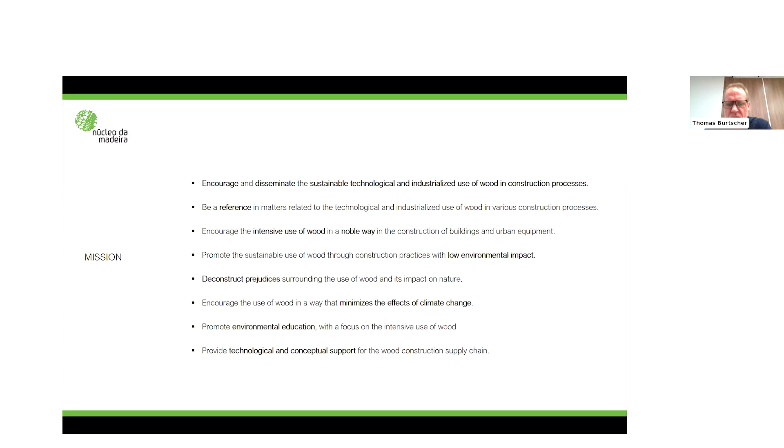So basically what we do, we advocate for the use of wood in construction from sustainably managed forests. We promote and demonstrate the viability of intensive, sustainable and noble use of wood in construction. We support industrial processes that make wood one of the most versatile materials. We demonstrate the contemporary nature of wood, and we strive to establish a sustainable supply chain for wood.

We basically focused on 5 axes: forests, components, education, design, and market.

And we are happy to say that we hosted an international event, from which we are developing a text. We'll go to COP30 that talks about the future of timber in construction worldwide.

We had very important people that deal with timber and construction, such as Eric Karsh, who works with Michael Green in one of the tallest buildings in the world. We have people from Japan like Tezuka Takaharu, who's worldwide known for his works, people from Chile, from France, from various countries. And from this final result, we hopefully wish to promote wood construction in Brazil.

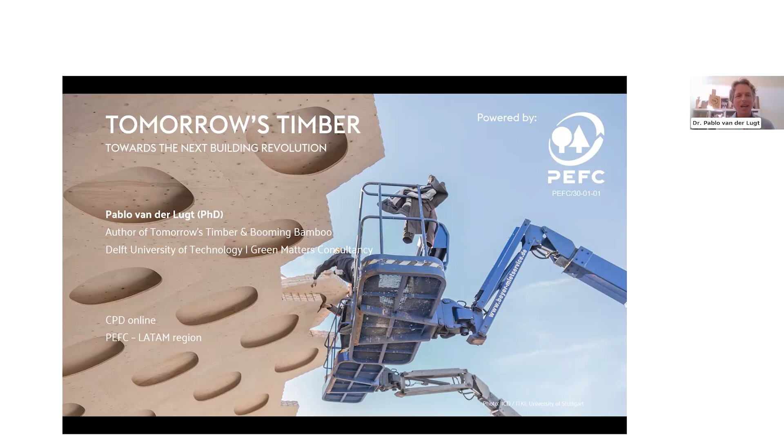Anyhow, it's a big pleasure to be able to present my latest findings. And again, it's also made possible through the support of sustainable forestry, through schemes such as PEFC, so I'm very grateful for that. As Adriana mentioned, I've written a couple of books and I like alliterations, so Tomorrow's Timber, Booming Bamboo. It was hard to find an alliteration in Spanish and Portuguese, that's on my wish list. But it's good to know that if you're interested, the book is also available in Spanish. So what I will be talking about in about an hour, if you really want to go into details and more background and scientific references, try to get a hold of a copy of the book.

Today, we're going to talk about the historic evolution of timber. Where did we come from and how did we end up making high-rise buildings out of timber? The why - why should we build in timber? What are the benefits? But also, what are the challenges? Because it is a completely different way of building than that we're used to. So in the coming hour, I hope you will learn more about it.

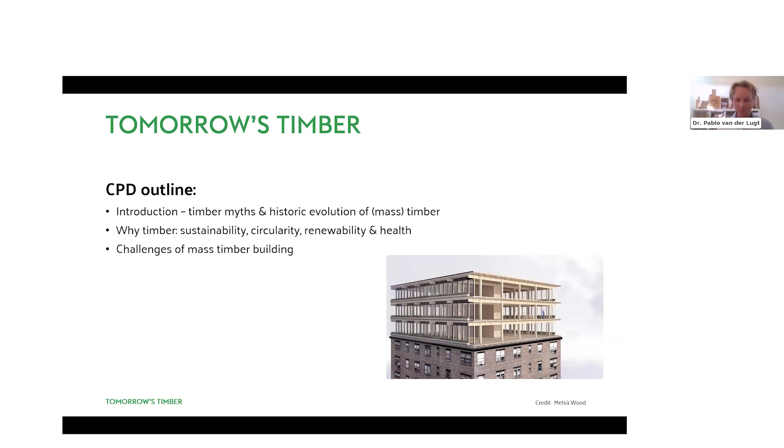So beginning from the start, and again, I'm talking a little bit from a European perspective, so bear with me, but I think it applies to the whole of the world. In the past, we used a lot more local materials, and most of those local materials were woods, but also bamboo, reeds that were grown locally. And we still see the heritage of the use of renewable materials, including timber, all over the world in our ancient buildings. In Europe, for example, we have churches over 1,000 years old, just made out of timber. Many of our historic houses in medieval city centers are made out of timber, largely made out of timber, inside and out.

This is one of the oldest buildings I know of in Japan. It's more than 1,500 years old, and it shows that if you construct well, timber can be very durable and survive for a very long time. Look at this particular design. It's quite simple, just overhangs, making sure the timber remains dry. Even if it temporarily gets wet, it's not a problem because it can ventilate and dry again. So timber can be an endless material in terms of lifespan.

But then came the Industrial Revolution. In the past, we used to build a lot more with timber and renewable materials. Then the Industrial Revolution came, and timber, which is of course a kind of irregular material, was largely substituted by bricks, by iron, later steel, and concrete. That makes sense because these materials are very stable in their technical performance. At that time, timber was not.

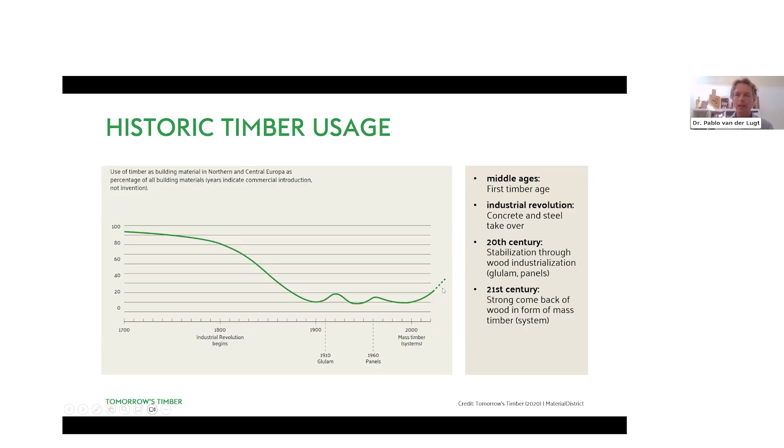So since the 1900s, there has been more standardization in timber construction through the development of glulam, large glue laminated beams, and the development of all kinds of panel materials—MDF, particle board, OSB. But since 2000, something interesting is happening, and the use of timber is increasing, because of the development of mass timber products.

If we have the timber source from a sustainably managed forest with a PEFC certification, we can do a lot of things with this resource because it will grow back. Part will go to the paper industry, maybe a part to the energy industry—I hope as little as possible because the CO2 will be emitted again. But a large part will be used through stranding, through peeling, or just through sawing into a whole assortment of timber products.

And the latest generation of timber products, like cross-laminated timber (CLT), glue laminated timber, but also, for example, laminated veneer lumber—I'll explain more about it later—enables timber to be used also in high-rise buildings with very good technical performance, such that it can substitute non-renewable materials like concrete, steel, and brick. And it gives a lot more opportunities actually.

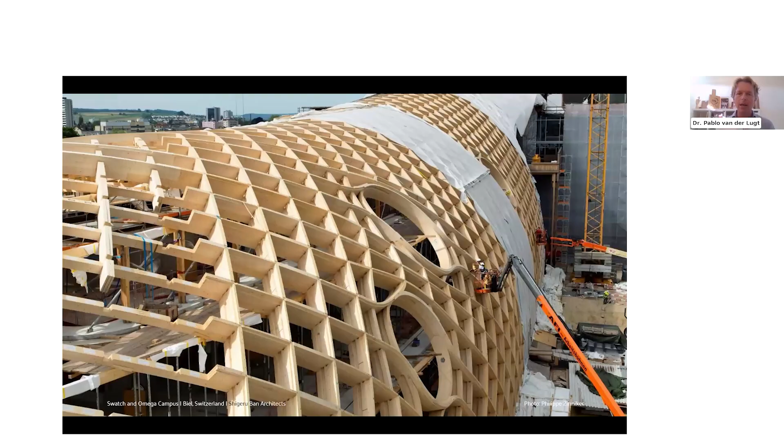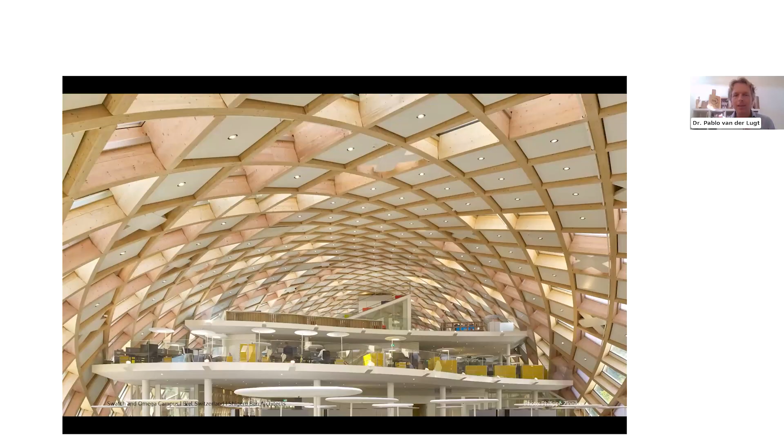As timber is 5 times lighter compared to concrete, you can make incredible designs based on parametric modeling. Look, this is the Swatch headquarters in Switzerland—look at this guy, how small he is. These are huge elements, all pre-manufactured in a factory based on CNC milling, and every piece fits into each other like a jigsaw puzzle. So this is the inside—it's curved, but every element is almost fitting into its place with millimeter precision.

Because it's so light, you can also make huge spans and fantastic architecture. Michael Green is one of my favorite architects—this is not his building, but he also designs skyscrapers out of timber. And we can also, with mass timber products, go up to almost 100 meters high.

Up to now, this is the tallest timber building we have in the world, completely made out of timber. There are higher ones, but they are hybrids with a concrete core. This project in Norway is fascinating because it uses timber on the outside, thermally modified cladding, but also on the inside. Going one step back, here you see the glue laminated columns and beams, the CLT flooring and walls, and outside the thermally modified, locally sourced pine.

This is another timber skyscraper, 80 meters tall, in Sweden, and it shows the many prefabrication possibilities of building in timber. Because it's so light and workable, you can make all 2D or even 3D elements completely in the factory, put them on the back of a truck, and build a lot quicker. Sometimes even the sanitary units and kitchens are already installed.

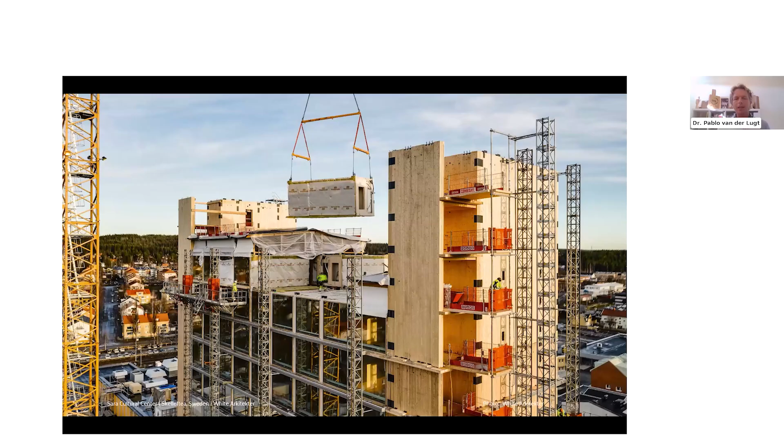I like this building, Sara Kulturhus—it's a hotel and conference center. It's magnificent, right? And it's all locally sourced, made of PEFC certified locally sourced timber. Even the elevator shafts are made out of pine, locally sourced pine. Here all the concrete is replaced by CLT, cross-laminated timber, and also on the inside you see timber.

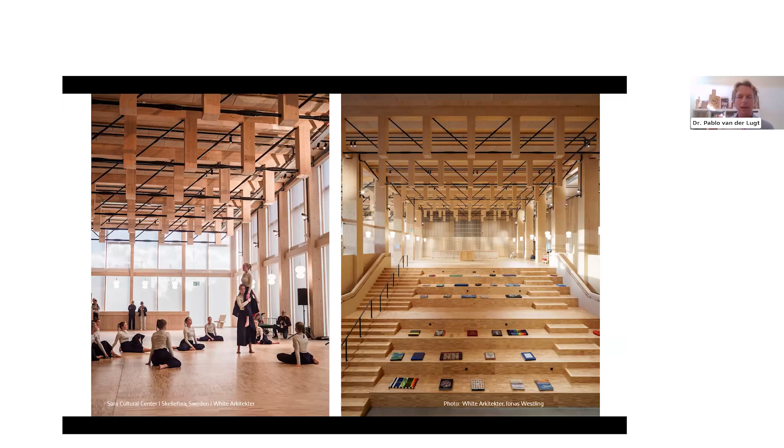I think you all know people love timber because of the aesthetics, because of the tactile aspects, because of the odor, but also because of the sounds. Look around you—when you go to a music theater, you'll almost always see a lot of timber around you.

People relate to timber, but they're also often worried about using it because they know the tree has grown for years. This is why it's so important that you only source timber when it's sustainably managed, and why hallmarks like PEFC and FSC are so important.

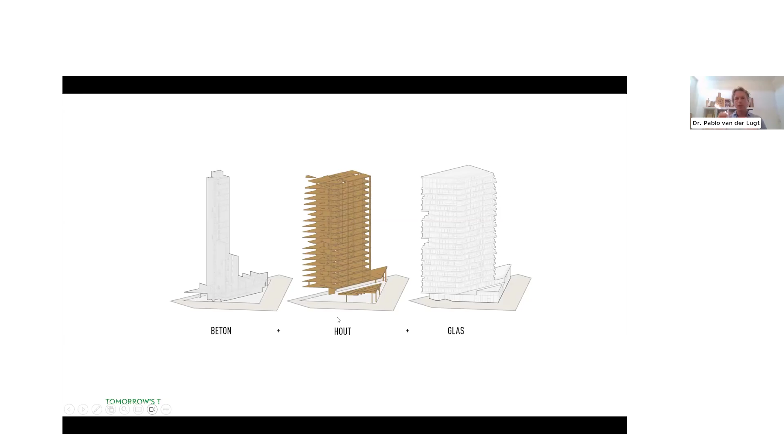Let's go to the Netherlands, because now we also have a skyscraper in timber there. This is Amsterdam, on the Amstel River. You see this building and think from the outside it's just an ordinary concrete and steel building, but don't be mistaken, it's largely made out of CLT. It's really high-end, and yes it still has a concrete core, but all the floors and structural walls are made out of CLT, covered with a whole skin of glass.

Timber is left exposed inside, and many people love it. They don't want everything in timber, but when, for example, the ceiling is in timber or the floor, or one or two of the walls, they love it. And it can also be high-end. So this is not just for tree huggers or ecological purists, it's also for mainstream people.

In South America, you're still starting with the mass timber revolution, and I tried to find a couple of projects with PEFC certified timber. This is one I found with the help of the PEFC Brazil team.

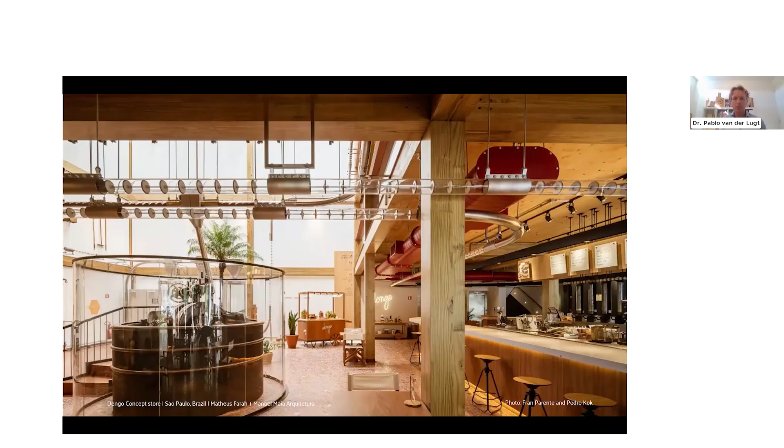It's the Dengo concept store. What I like about this building is that all the timber is left inside, and as I understand it, it's made from locally sourced timber from one of the local pioneering CLT factories. So I like it, of course. If you can use timber which grows locally, that's always better in terms of transport. Here you have Brazilian CLT, and correct me if I'm wrong later in the Q&A, but for me this is very cool to see.

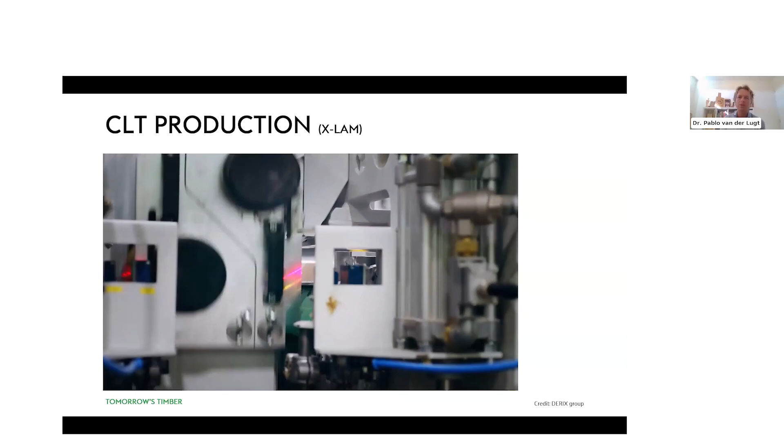So how is CLT made? This is a German factory, and look, it's just spruce. It goes through a laser eye, which is very important because it detects defects, knots, or other weak points in the timber. The weak points are taken out, and then you have the finger joint you see there. So what you see on the top and bottom of CLT is almost faultless, strong boards, and the lower quality boards go in the middle.

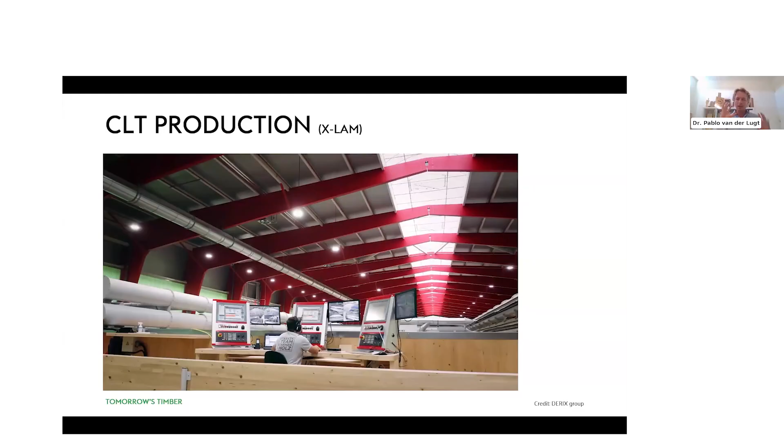I have a piece here. It's always an odd number of layers, 5, 7, 9 layers. All the processing happens in the factory, the milling for electricity, fittings, window openings or door openings, everything is done there. You saw some glue application. Many people are worried about the glue, but there's only 1% of glue in such a piece of CLT, so that's very little and it doesn't restrict recycling possibilities.

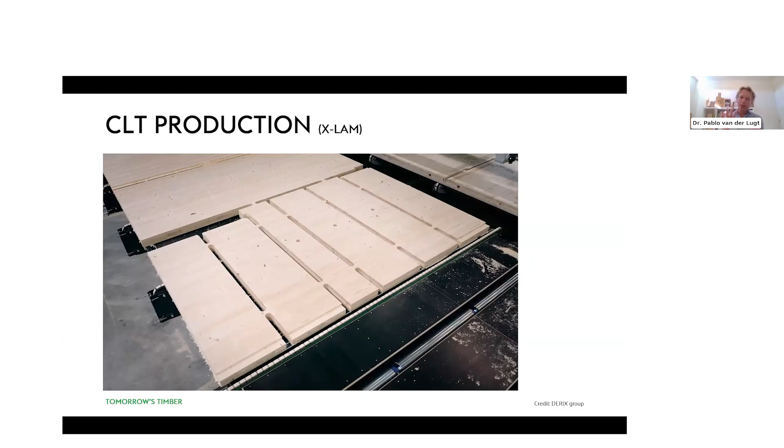When these pieces are ready, they go on the back of a truck to be transported to the building site. I make the comparison with IKEA, it's like an IKEA cupboard, but here it's 10 or 100 times bigger, and in this case it does fit. It's easy to make. So what you see here isn't a building site, it's an assembly site, because you can construct a lot faster when you use mass timber elements.

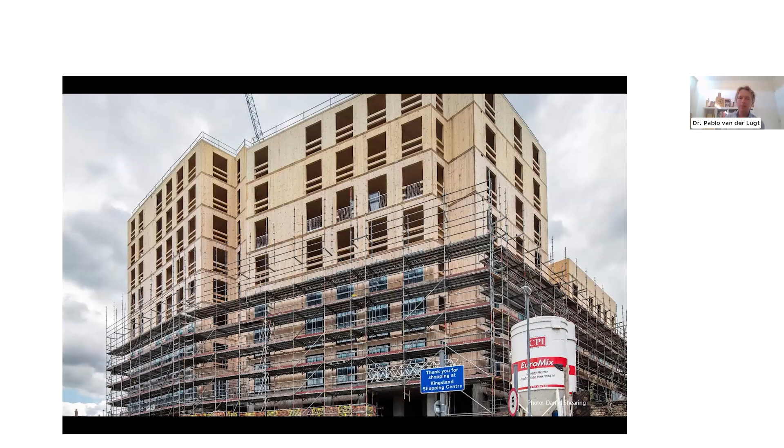Let's zoom in on this building, located in London. From the outside it looks like an ordinary brick building, like with the building in Amsterdam called Hout. This one, Dalston Works, from the outside you could say it's an ordinary concrete or brick building, but it's not. Don't be fooled, because it looks like brick, and even on the inside you wouldn't see there's timber. I think that's a pity, but it doesn't matter, because for carbon storage benefits it's still a very good idea.

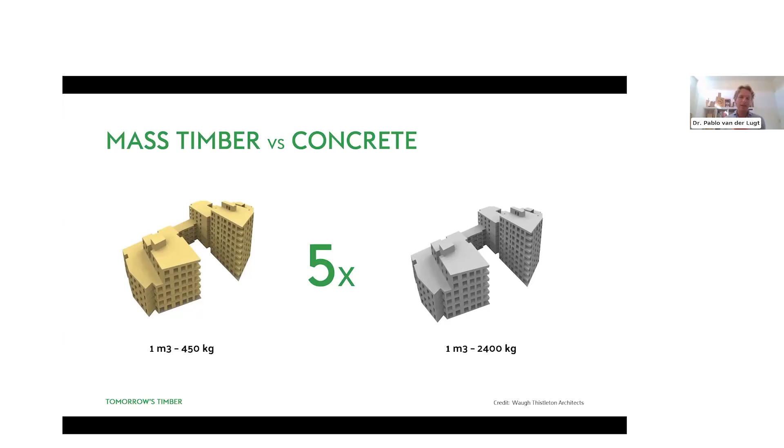But if you look at the inside, it's all made out of CLT. For this project, they chose timber for sustainability reasons, but also for logistical reasons, because as I explained, timber is 5 times lighter than concrete.

This means you can work on tight building sites in the middle of the city center with a lot less nuisance, because you can build so much quicker. You can use smaller cranes. You need a smaller building site. And in total, instead of 700 concrete truckloads, you just need 100 timber loads, because timber is 5 times lighter. You can also stack a lot more timber on one truck.

And then you get to the building site, and then it goes incredibly quick. It's 9 months faster, this building, compared to in situ cast concrete. So think about that. You have less noise, less people on the building site, and you can also deliver a lot quicker.

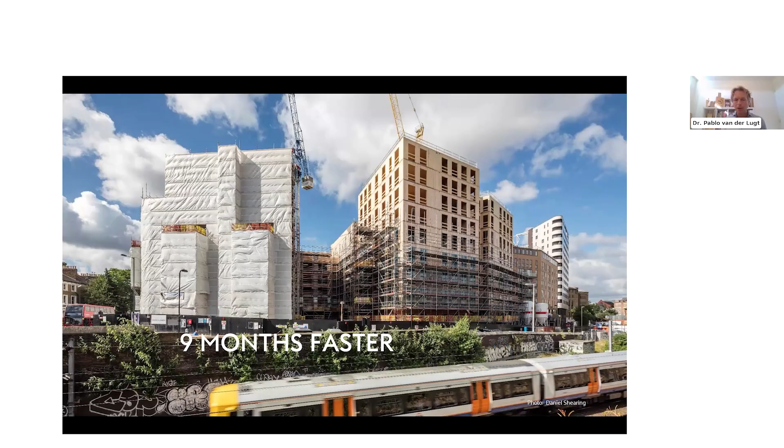They made a cost comparison for such kind of apartment buildings in concrete and in CLT. Because the building is lighter, also the foundation can be lighter. It's still concrete foundation, but you can have a less heavy concrete foundation. So you save some money there. Above ground, timber is still a little bit more expensive, and also CLT, so you will pay a little bit more.

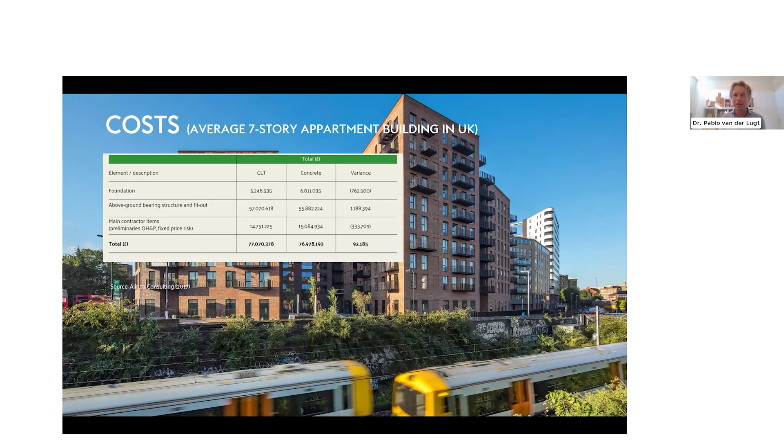But then if you take into account that you build a lot quicker and that you get your rental incomes, because this was made for a developer, 1 year earlier, then the business case becomes very close to cost neutral. So the main contractor items, for example, are lower for a CLT building than a concrete building. So in total, maybe a little bit more expensive, but if you think of the benefits and also the CO2 benefits, which I touch upon later, I think we are soon coming to a break-even point.

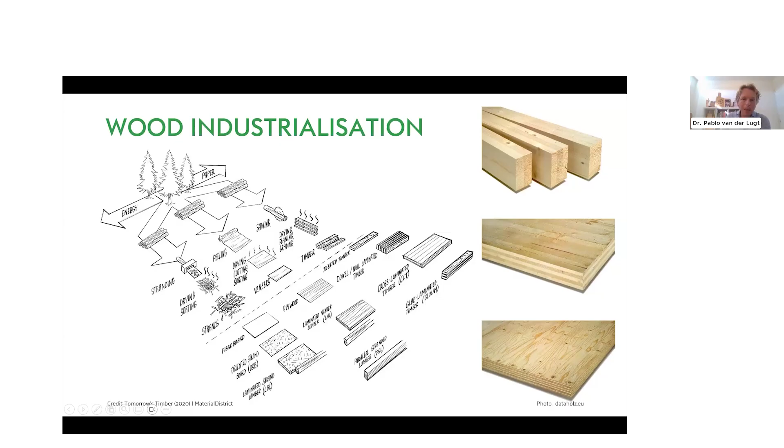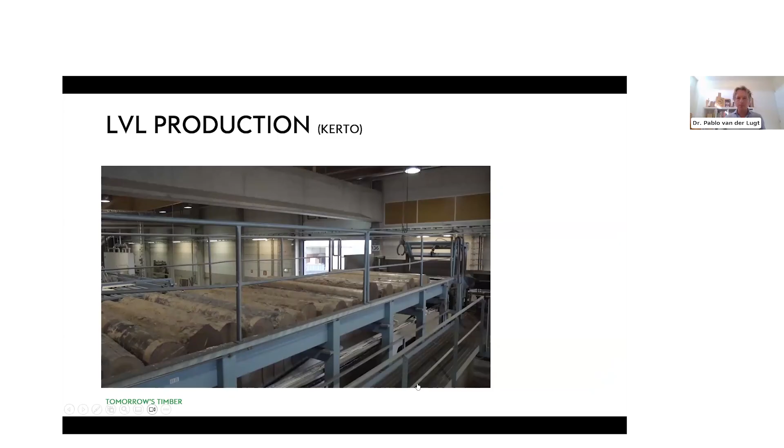So I just showed you now a CLT building, but let's also show you another important mass timber product. That's LVL. LVL is made of peeling a complete roundwood stem. So I'll show you how this goes. So you have those roundwood logs. They're cut to pieces. And then look how much of this whole roundwood is used. Look at this. This is fascinating to me. It will be peeled almost to the end here.

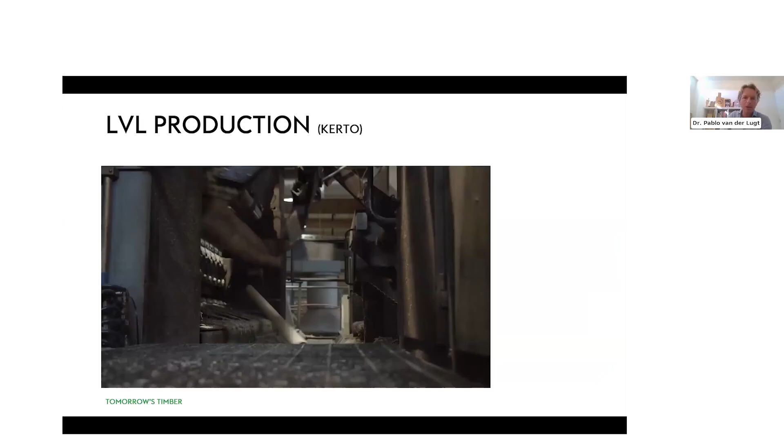So you have the whole log, it all goes in an automatic way, and almost the complete log is processed into sheets, veneer sheets. Then these veneer sheets are also checked on defects. The poor parts are taken out, then dried, and then in the end, and I'll go a little bit further, it will be pressed to each other. This product uses a little bit more glue, about 3 to 5% of the material dry weight is glue.

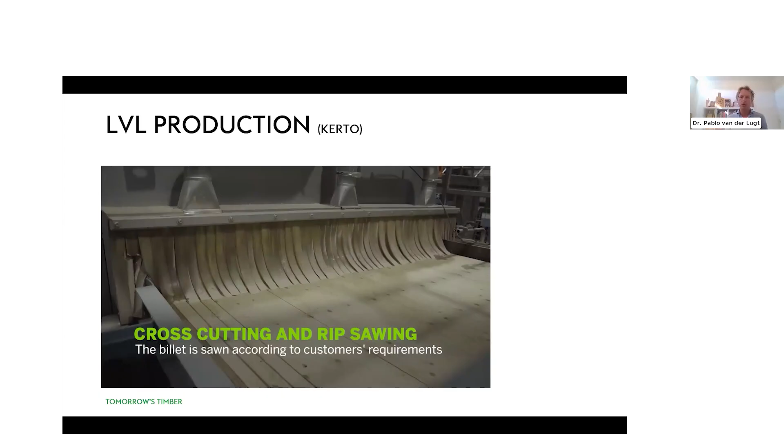And then you have these very strong elements that you can use as a panel, but you can also use it to make very strong, really very strong beams. For this, you can make very long spans. So this is an example. These elements are called cassette flooring, and you can make spans up to 10-15 meters with this laminated veneer lumber, LVL technology.

So this is an architectural office in the Netherlands, which is made using these cassette floorings based on LVL. And in the end, I think it's very small, but here I have a piece. You see the little layers that it is made of.

But this is also an interesting building, designed by, let's say, the Michael Green from Europe, Andrew Waugh. The black and white building, it was recently opened. And it's made with LVL, but special LVL. Because typically LVL is made from spruce or pine, but this one is made out of beech. Because of climate change, we see that deciduous trees are coming more up north in Europe, and beech and oak become a little bit more the dominant species.

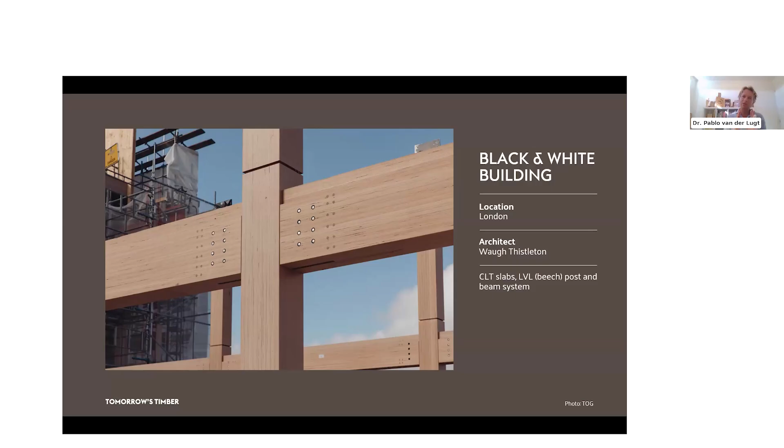So this manufacturer makes LVL from beech, and beech is a little bit stronger than pine. So this means that the beams can be even more thin than they would have been made in glue laminated timber. And long spans again. So this is a very interesting project showing that also other tree species besides the often used coniferous species can be used for mass timber products. So that's a picture on the inside.

So I hope I showed you a little bit what the developments are. In a second, at the end, I'll also show you some bigger developments, neighborhood developments. But you see, there's a lot of things happening in Europe. And why is this happening? Why do these kind of architects like Michael Green and like Andrew Waugh, why do they choose wood? Well, for very clear reasons.

One, obviously, climate change. If we look at the built environment, almost 40% is related to it. Of this 37%, 2/3 is related to the operational energy use of our buildings. But 1/3 is related to the embodied carbon, so the CO2 emissions during the production of building materials.

If we look at the CO2 emissions just of the concrete and cement sector, it's responsible for 8% of our global CO2 emissions. Steel, aluminum, plastics, almost the same. So to put this in perspective, the whole continent of Latin America emits 6%. So just the concrete industry emits more CO2 than the whole Latin American continent. Think about that.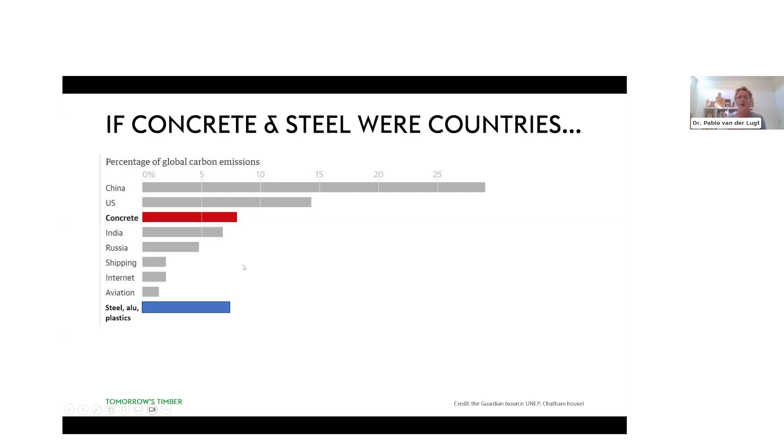Why isn't timber here? Well, one of the important reasons is that it will emit very few CO2 emissions during production, which I'll show more. But the big benefit is that every plant or tree absorbs CO2 during growth through photosynthesis. The carbon is absorbed through glucose in cellulose and hemicellulose, and the oxygen is released again.

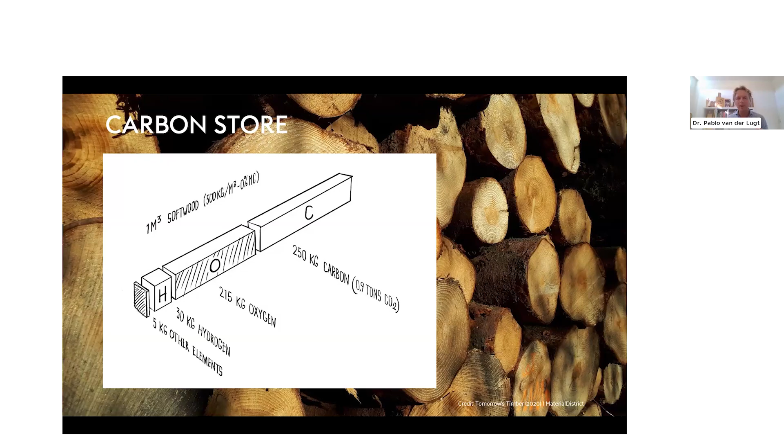So if we look at 1 cubic meter of timber, pine wood in this case, then half of it is carbon, and the carbon used to be CO2. The O2 we breathe again. So 1 cubic meter of pine during growth has absorbed almost 1 ton of CO2. So if we then start to burn the wood again, then the CO2 is emitted again. So that's not a good idea. It's a lot better to store this carbon in buildings.

And then many people say, okay, that might be interesting, but looking at the factories and the glue and maybe the sourcing of the wood and the transport, doesn't this emit a lot more CO2 than is being absorbed? Well, the answer is no. This is the life cycle assessment result for the CO2 of this factory, which I showed you. It's the factory of Derix in Germany. In 1 cubic meter, almost 800 kilograms of CO2 is stored.

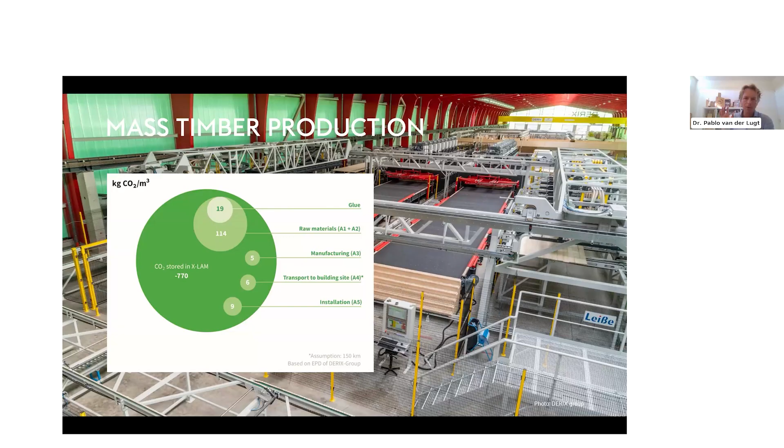The light green circles show how much CO2 is emitted. So you see the glue is only 19 kilograms of CO2. Other raw materials, transport to the building site. In total, the CO2 emissions are just about 1/8 of the carbon stored. So as long as timber and CLT is in use, you can really say you are storing carbon in the built environment.

And now comes the interesting part. And here also comes the counterplay with sustainable forestry. Because if we make it very simple, and I know this is super simplified, but this in essence is what's happening. If you plant a new tree in a sustainably managed forest, it will grow, it will absorb CO2. At some point, it will be mature. Depends a bit on the tree species, can be 50 years, can be 80 years. At that time, you come to a kind of CO2 equilibrium.

It's a good moment to harvest the tree and then not burn it for energy production, but use it in the built environment, because then the built environment becomes a carbon store. Then you plant the trees again, so this is what sustainable forestry is about. Then you'll harvest again. And here you see in total there's a kind of constant amount of carbon stored in the forest. This is carbon pool 1. But here comes carbon pool 2. That's the carbon stored in the built environment, and you can add them up.

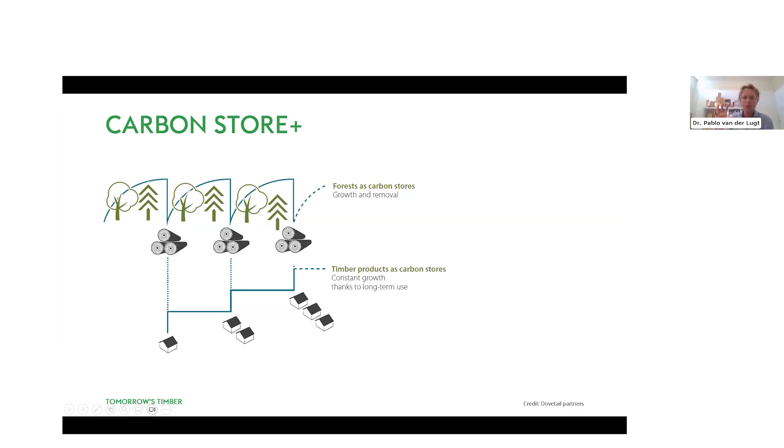Then, if we don't just start building little houses out of timber, but start replacing big buildings, which normally would be built in concrete and steel, with timber, then you also avoid CO2 emissions. I looked for another timber project in Latin America. I came across this fascinating building. It's a shopping center, La Serrezuela in Cartagena in Colombia. It was a former bullfight place. It was destroyed and it was rebuilt, completely made out of mass timber.

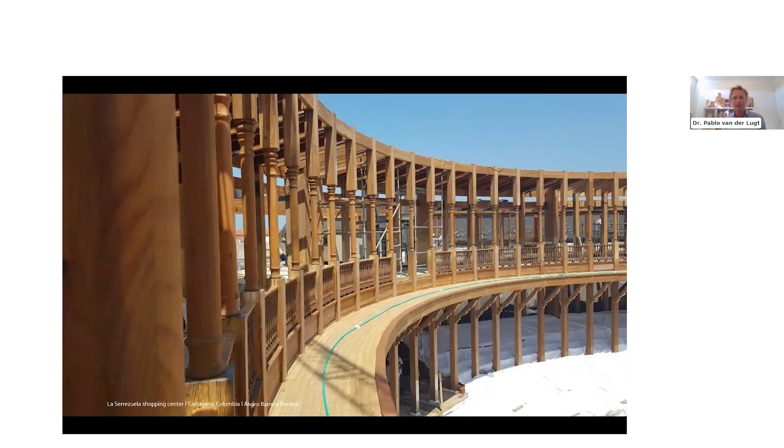Well, I haven't been there, but I really look forward to seeing this because it looks great. And in this building, they did use PEFC certified timber. In this case, it came from France, prefabricated and then built very quickly on site. If you imagine this building as a case study, it uses about 600 cubic meters of pine.

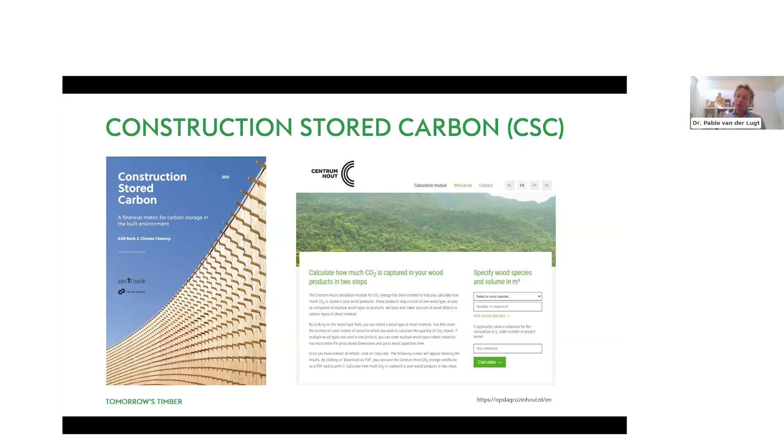You see here that it uses, as I said, almost 600 cubic meters of glulam. This will store almost 500 tons of CO2 for the lifetime, but it will also avoid over 500 tons of CO2 emission, because typically this kind of building shopping center would be built in concrete and steel. So in total, the CO2 benefit is 1,000 tons of CO2.

This meta study was published in Nature, a very respected scientific journal, and it models 2 scenarios. One, business as usual. We keep everything as it is. For scenario 2, we start building a lot more in timber and try to reduce CO2 emissions and capture CO2 in the built environment. What is the difference in CO2 emissions between business as usual, 10% in wood, or 90% in wood? Well, this is the 10% in wood scenario.

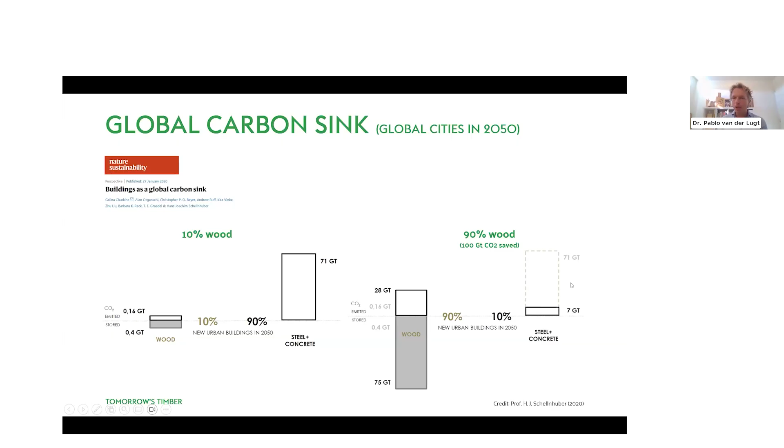You see a lot of CO2 emissions by the construction embodied carbon of steel and concrete, and low CO2 emissions with the production of timber, and actually a larger carbon store, as I explained, in the wood itself. Then 90% in wood. Well, then you see this is the avoided CO2 emissions that I just talked about. You don't have those emissions anymore of concrete and steel. And the carbon store is a lot bigger in the built environment.

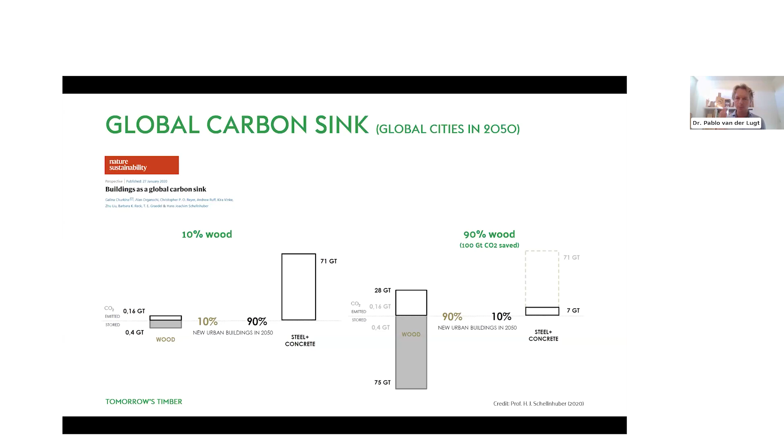So the difference between scenario 1 and 2 is 100 gigatons. Maybe it doesn't tell you a lot, but 100 gigatons is enough to compensate 25% of our carbon budget to stay within 1.5 degree temperature rise. So 25% of our carbon budget can be saved if we start building far more in timber. So that's clear, right? That's a big benefit, the climate problem reduction when we build in timber.

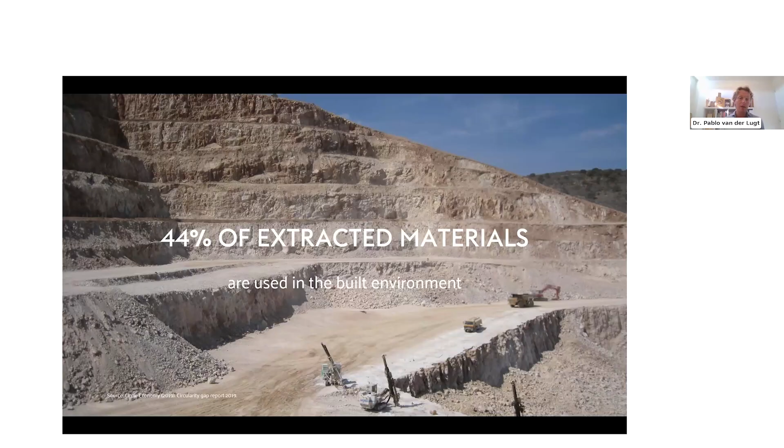And at some point, we will see that these materials do not grow back and will be depleted. This is in particular the case for metals such as aluminium and iron and copper and zinc, but also increasingly for oil-based materials such as PVC or PUR for insulation. So this will be an issue going forward. But many people are more worried about wood than about bricks and iron. Because, as I explained before, we care about timber.

So think about it. How long do you think the European forestry industry will take to produce these almost 600 cubic meters of timber for the shopping center? Just give it some thought. What do you think? If you have any idea?

So this is why it is so important to have chain of custody sustainable forestry schemes, because this will make sure, and Adriana also already mentioned it, that forests remain forests and no more timber is harvested than is regrown in the forest itself.

And I go very quick through this. There are two main schemes. PEFC is bigger, focuses a little bit more on coniferous trees. FSC is a little bit more dominant in tropical areas, but of course they both do a very good job in securing the whole chain of custody, making sure that the timber you use in your building project, over every part in the chain, meets people, social, planet, environmental, and profit and economical requirements. And of course, most of the requirements are focused on the forest itself.

I know PEFC quite well, and just look at the certification requirements. It's huge documents with requirements that you have to maintain about biodiversity, about the involvement of indigenous people, about the water table that has to stay intact, about the carbon storage. And all of this is covered from the beginning in the forest to the final product in the building site.

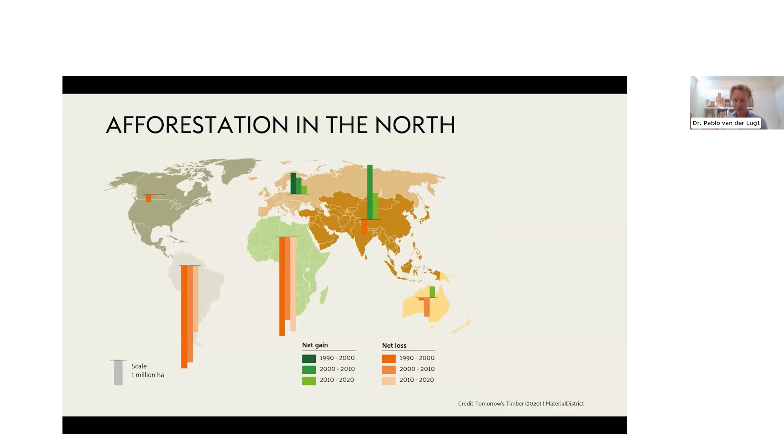So let's zoom in on this a little bit closer. In the European Union, you have 180 million hectares of forest. This grows with 0.3 million hectares a year. Doesn't sound like a lot, but this is 500,000 soccer pitches a year, which is added every year again with forest. And most of this forest is certified, PEFC or FSC.

And if you look at how much timber is harvested in these forests, it's only 500 million cubic meters. The annual increment is about 800 million cubic meters. So that means every year there's 300 million cubic meters extra on roundwood that is grown in the European forest.

On the short term, you cannot reach all this surplus biomass. But within about 5 to 10 years, the Wageningen Forestry University has calculated that you can easily, in a sustainable way, harvest 50 to 100 million cubic meters extra. So let's see how much it is. Let's make a conservative assumption, that it's only 50 million cubic meters extra.

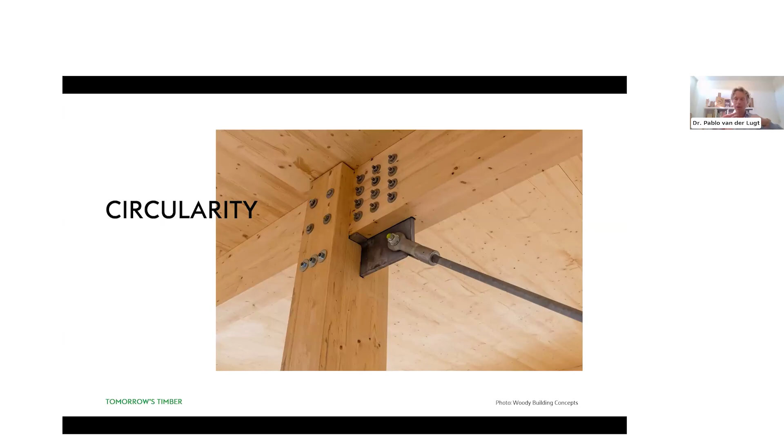If we talk about renewability and the problem of scarcity, you have renewability in the forest, but if you design for disassembly, then at the end of life you can also harvest materials from buildings that are being demolished, or let's call it dismantled. This is so nice about timber because most of the connections are made in a dry manner—they're just bolted or screwed together. That means you can also unbolt or unscrew them.

I'll show you another building, which from the outside might seem not that much made out of timber. But if you look at the inside, the full structure is made out of glulam columns and beams. This is interesting material because these are hollow floors, kind of a cassette flooring system, and they also include the sound insulation.

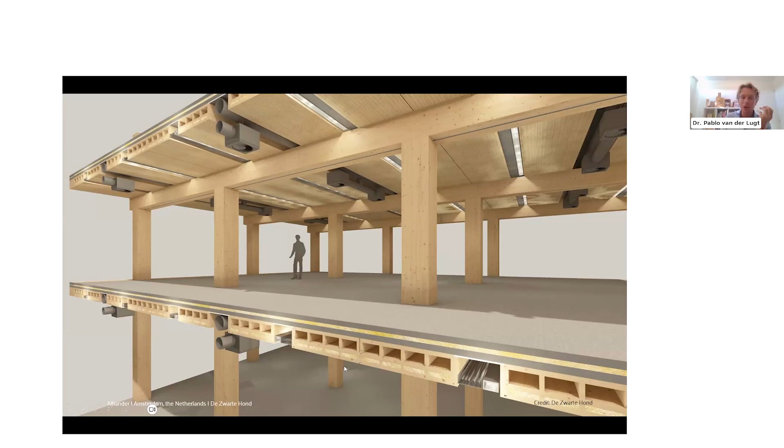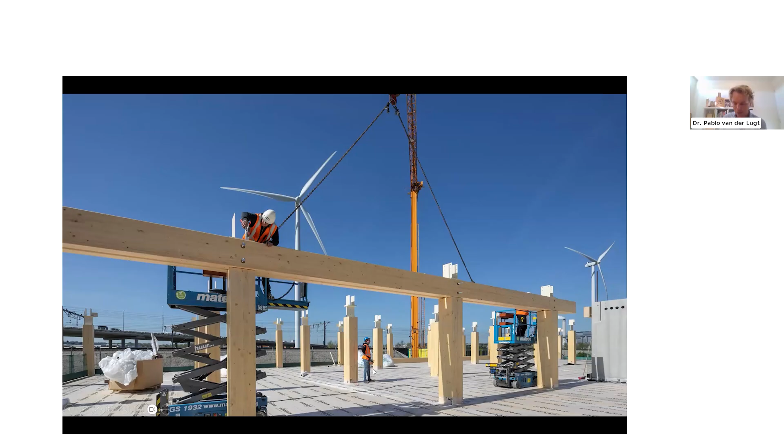When you see this building site, you notice very few people on site. It's really built like a Lego system—the elements come to the building site and are just bolted and screwed together. You need very little people on the building site, and only small cranes. You can build a lot quicker this way too.

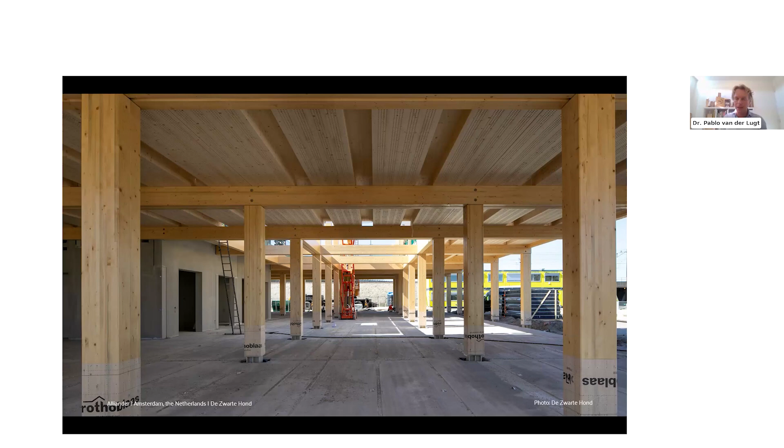These are the cassette flooring systems I was talking about, and everything is put on top of each other. So you can just unbolt and unscrew it, and you have those elements available again.

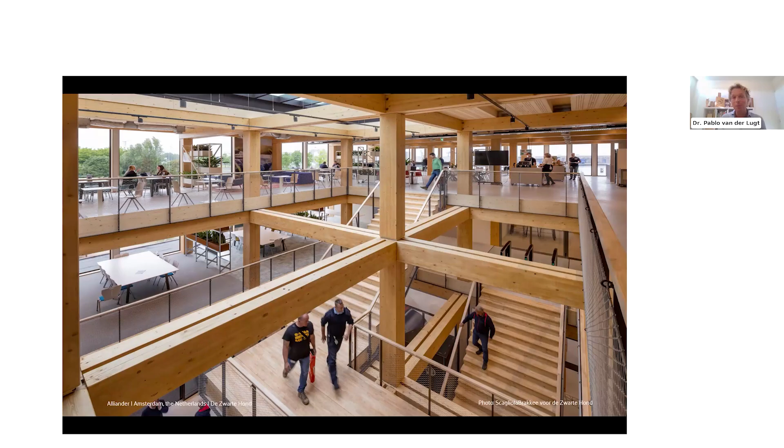Now, the final building is really beautiful, and the people working in it really love it. Compared to the previous building they worked in, which was steel and concrete, the sickness absence percentage has reduced by about 2%. So think about that—your laborers love working in the timber building, but it's also very demountable and circular.

To give you another case study, from the Netherlands, in Amsterdam's central business district, this little building is being demolished. It was made for the bank ABN AMRO about 10 years ago, designed to be the most circular, dismountable pavilion or building available, and it was set to be used for 100 years. But then the land was sold to another investor who wanted to build a bigger timber building there. So now the proof is in the pudding.

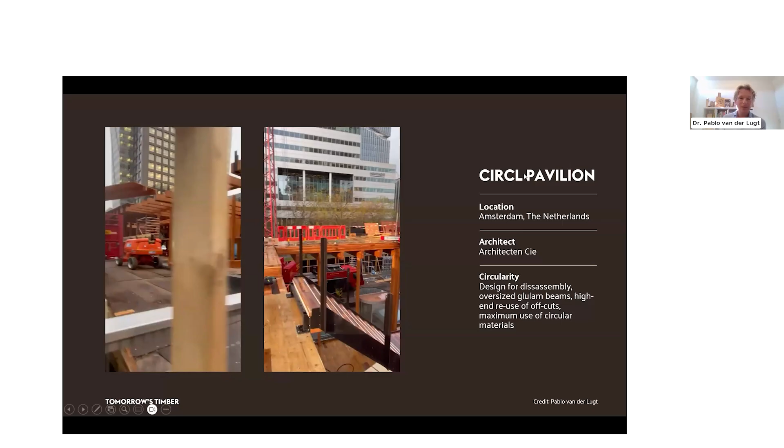This building, designed for disassembly from the start, had to be deconstructed. This is the building site—I filmed this myself with my own phone. Here you see the whole building being dismounted. It's just reverse engineering. You can hear the guys working on the screws. And that's it.

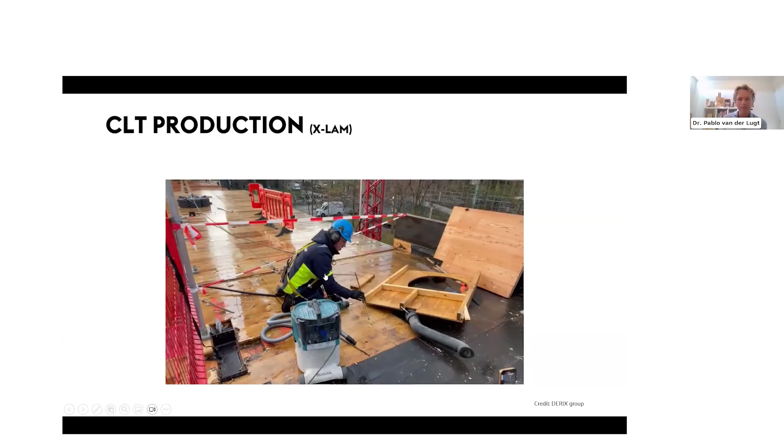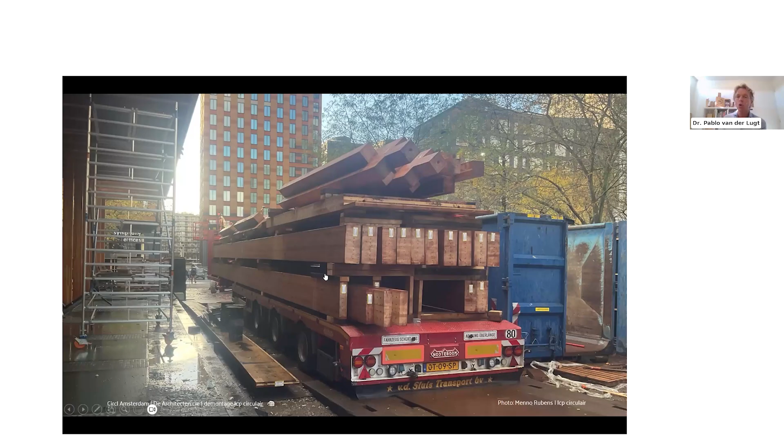It's very simple—it's reverse engineering. The elements were labeled, as you see here, and put on the back of a truck. They're completely suitable for reuse, so now they're in a warehouse, and there's a tender process going on: which developer wants to buy these elements? I can tell you, they just go for the normal price. This shows that you can build in a dismountable way, and that the theory actually works in practice too.

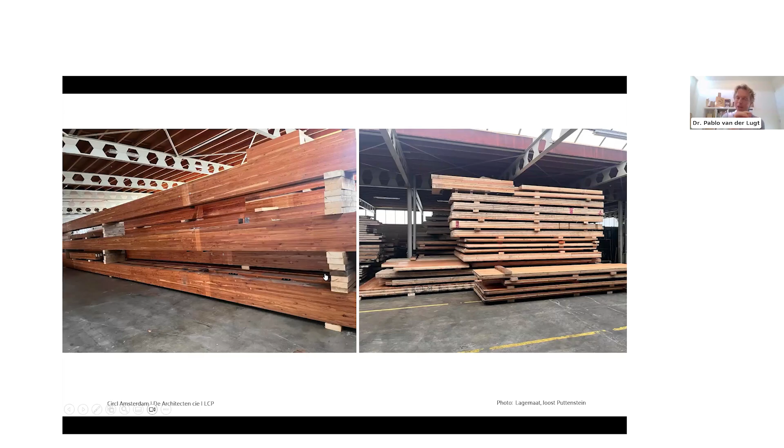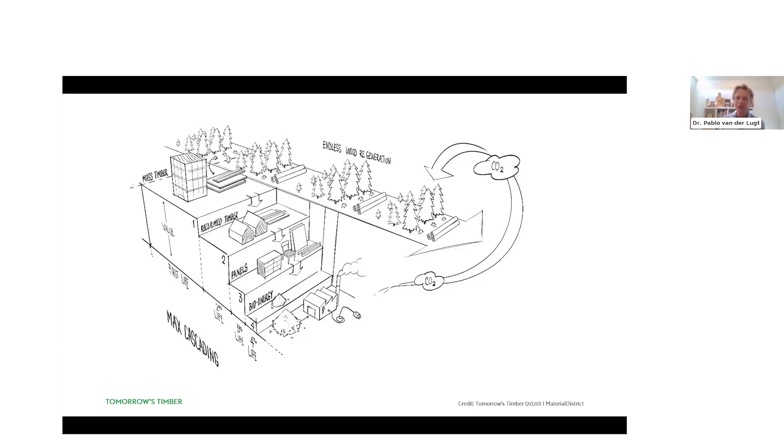If you design well, the first life of a timber building can be 100, 200 years, or longer. If you design for disassembly, as I just showed, then you have a second long life of timber, maybe again 100 or 200 years. Only then, if the quality isn't good enough anymore, can you make particle board out of it and use it, for example, for the furniture industry or timber frame housing. And only in the fourth or fifth life should you burn the biomass for energy. Meanwhile, if sustainably managed, the forest will have grown back 5 to 10 times. So I always call timber double circular, because you can reuse it, but it also regrows.

So for the final part, I want to give you some points of attention. Most engineers and architects, when you design and build with mass timber, it's completely different than traditional building. So it has some challenges, but you just have to know about it.

One, acoustics. Timber is usually 5 times lighter than concrete, depending on the species, but most pine is 5 times lighter. This means that especially for footfall, vibrations will be transferred more easily. For airborne transmissions, this can be solved quite easily - you just use elastomers and make sure you use the cavities. So airborne insulation isn't too difficult, but the more challenging part is the footfall, the vibrations that can go from one apartment to the other.

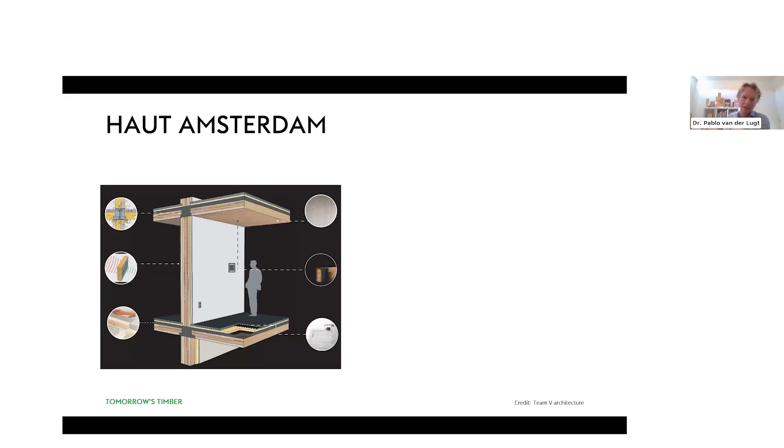So usually you have to add mass on top of a CLT structural floor. I go back to the case study in Amsterdam, Haut, because this building uses a system which combines CLT with a top layer of concrete to give the mass. Because of this, footfall is not a problem anymore. This also explains why you still see CLT in the walls and ceiling, but not on the floor, because they put the concrete screed floor on top. What I don't like about this system is that it's not too circular, because at end of life, if you want to dismantle it, you have this element made out of CLT and concrete connected with anchors, and you cannot cleanly split and divide them again.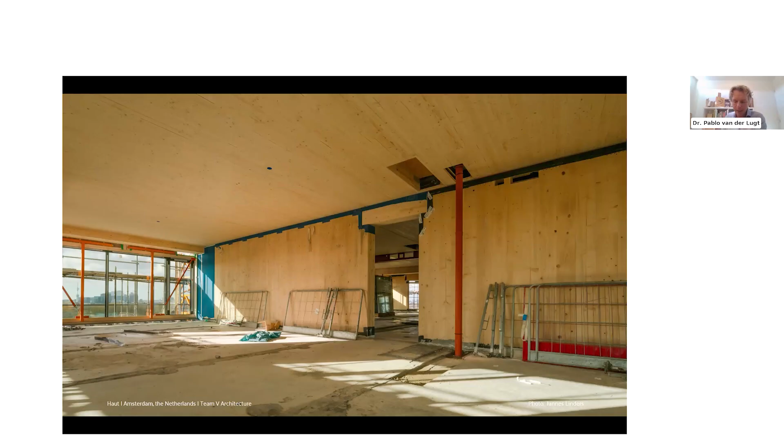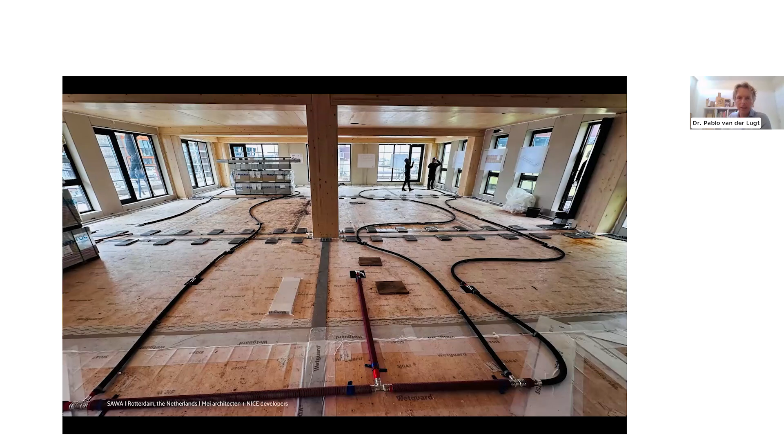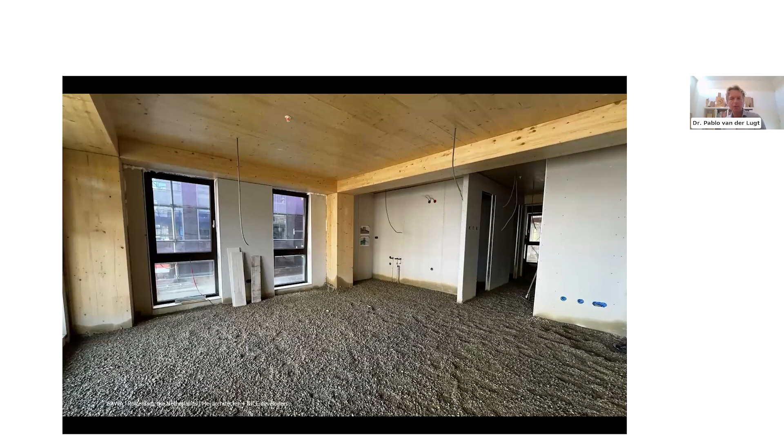So a new system works like this: you put all the installations on top of the CLT floor, then you put a Wetguard - a non-permeable foil - to make sure the CLT doesn't get wet in case of leakage. Then you add gravel or sand on top of it. This is another example where gravel is put in, and you can imagine that you can very easily take the gravel out at end of life because it's not connected to the CLT. Then you put the finishing layer and finishing floor, and you're ready to have a very nice apartment building meeting all acoustic requirements. This is of course in a nutshell - it's far more complicated than this, but it gives you a little bit of an idea. For acoustics, it is challenging, but you can solve it.

And actually the same applies in terms of fire safety. What I show you here is, remember, the tallest timber building in the world, Mjøstårnet in Norway, a very tall building I showed in the beginning. They had to do one-on-one tests to make sure this building got the fire permit to be 120 minutes safe. So they did that by over-dimensioning the timber.

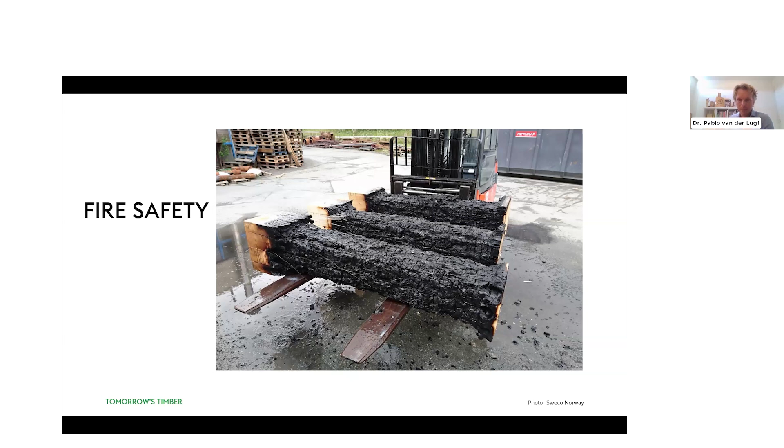If you don't want to do this, because maybe it's a little bit costly, you can always encapsulate the timber and put gypsum fire-rated board on top of it. But then you don't have the health benefits - you don't see this timber anymore. So I think it's a pity. I prefer a lot more that you slightly over-dimension the timber.

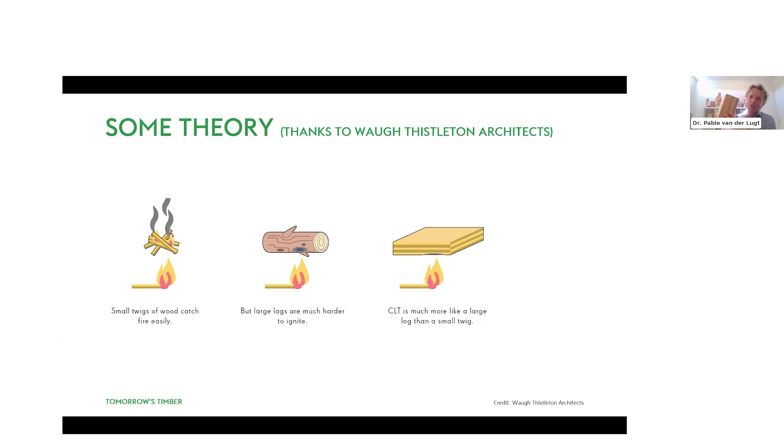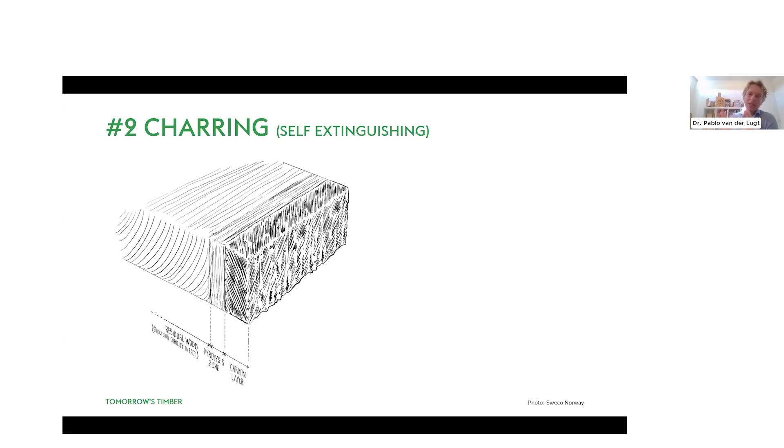You can imagine if you have a big piece of wood - and this also applies to CLT - if you try to put this in the fireplace, at some point it will char and on the outside it will get dark. But behind this charring layer, the timber remains structurally intact. We know exactly how quickly this charring goes: it's 0.7 millimeters per minute. So if you over-dimension, for example, with 4.2 centimeters, you have 60 minutes of fire safety.

So these are the one-on-one tests I was talking about for the tallest timber building in Norway. This is another tall timber building in Rotterdam, which just opened. Here, 3 fire safety measures are combined - though I mentioned 2. So number 1, finish with a fire-rated gypsum board. 2, over-dimensioning. And number 3, which is a little more costly, is adding a sprinkler system. You don't have to do this for this building - they wanted this just for the feeling of safety, because also in the Netherlands, mass timber buildings are quite new.

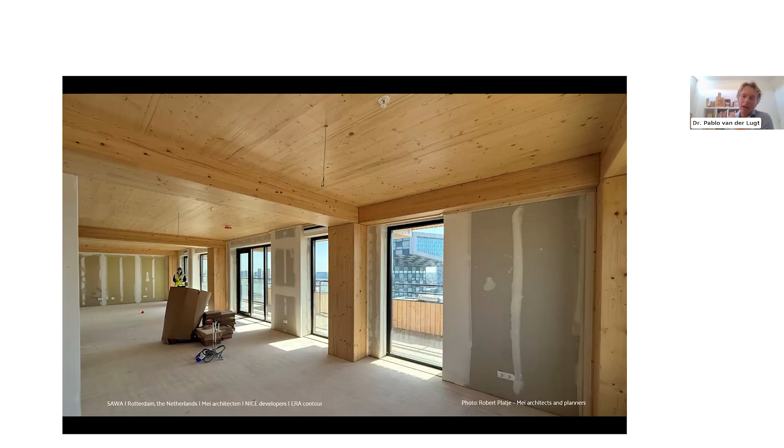But why I really like to keep the timber inside is because it gives a lot of health benefits.

And this fits with the principle of biophilic design. There's a lot of research done which shows that people, when they are in a building with a lot of daylight, with a lot of plants and a lot of visible natural materials, and sometimes also organic forms, perform better and have a higher feeling of well-being.

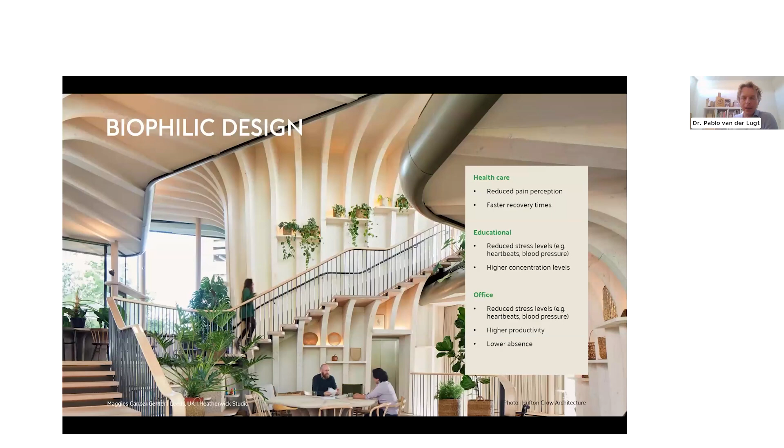What you see here is not a coincidence. It's a cancer healing center in the UK. And we see an increasing amount of evidence which shows that people that work, live, or are educated in timber buildings just perform better. This is another of those cancer revitalization centers.

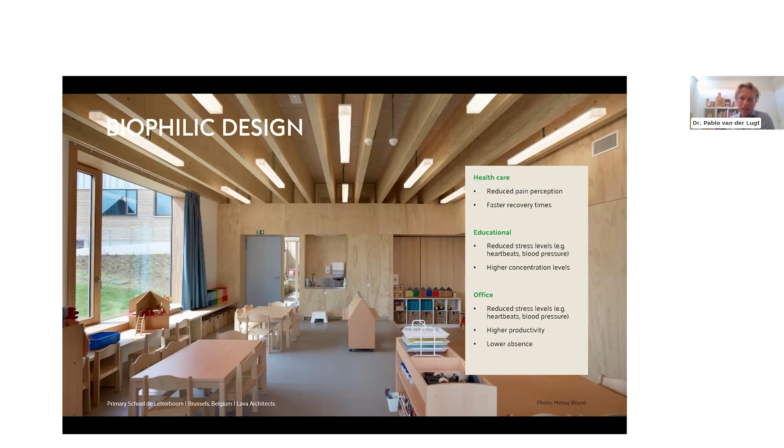This is a school. And also for schools, there was a very interesting study in Switzerland which showed that pupils followed for one year in a timber building, compared to a plastered classroom, had lower heartbeats, higher concentration, and better overall grades and performance.

So people like to live and work and stay in a timber building.

Imagine offices that are finished with plants and a lot of timber. This is a big survey done in Australia, showing that people working in a timber building had better performance and better concentration and just felt better.

Think of the value of that before looking just at the costs.

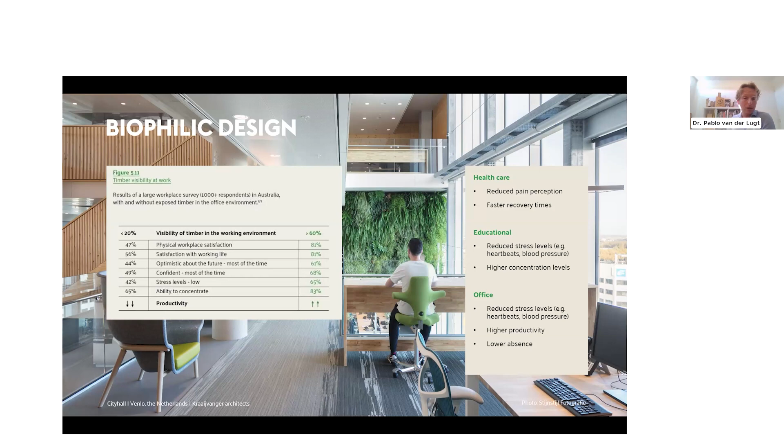Because of this, there are many green building certification schemes such as BREEAM and LEED, and one which only focuses on well-being is called WELL, W-E-L-L. And you see that also here, timber scores very well.

And that partly comes from the PEFC certification, but it also comes because of the low carbon emissions and the health benefits of it. So the highest scoring BREEAM building worldwide is in the Netherlands, almost a perfect score, and it's completely made out of cross laminated timber.

Then you see also many LEED certified buildings on the highest levels, platinum or gold, which are made out of timber. And the same applies for the well-being standard WELL, with several high scores possible, the WELL Platinum Award for various timber buildings.

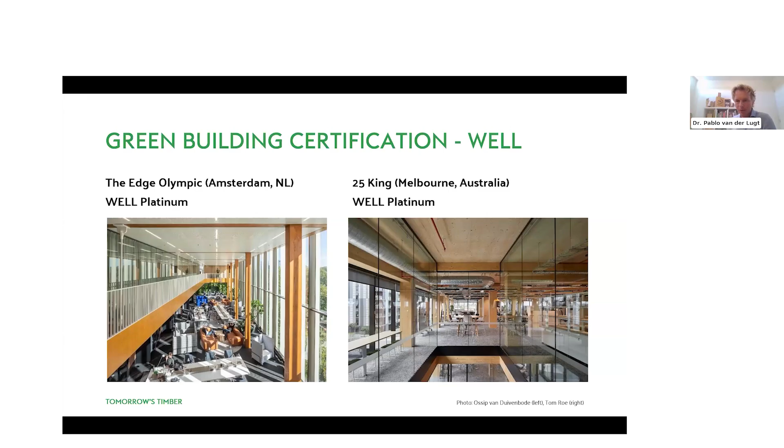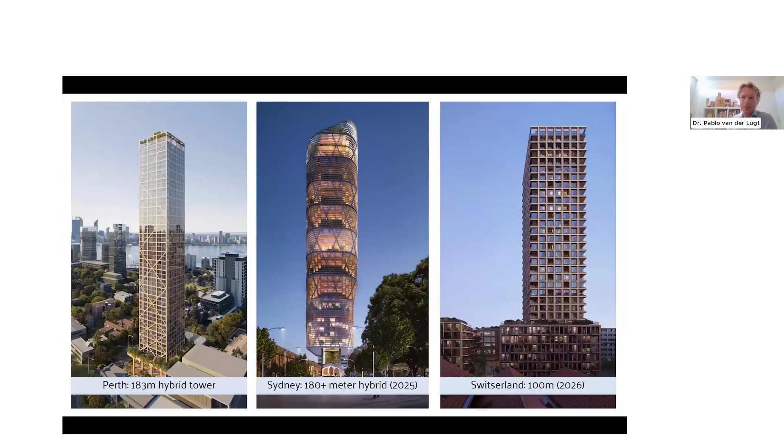So if I briefly look at the future, I already showed you that a lot is happening, at least in Europe, and it's going to continue. Because we see bigger buildings, bigger developments, skyscrapers announced over 100 meters tall in timber all over the world. But what I find most exciting is that instead of just separate buildings, I see now whole neighborhoods being announced and developed in timber.

I can also show you hundreds of those, but the biggest one, which was announced about two years ago, is in Stockholm, in Sweden. It's the Wood City. It's a former brownfield, which is going to be turned into a complete neighborhood made out of mass timber. Very nature inclusive, as you can see, having 7,000 offices and 2,000 houses.

And the construction has started. So this development should be ready in a couple of years. And we will have our first completely timber city.

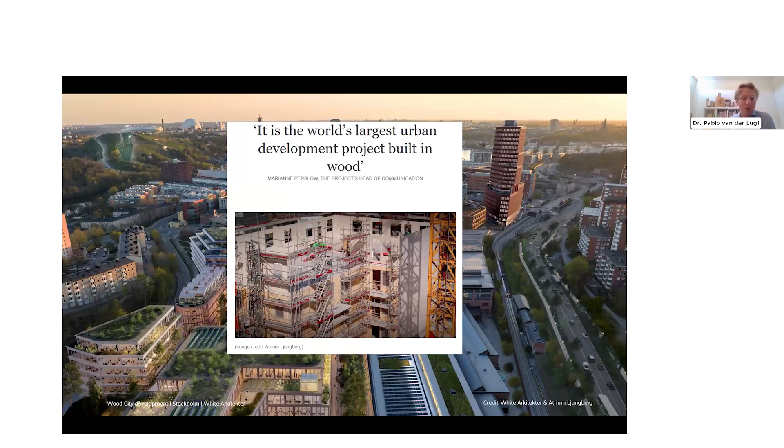So sometimes when people ask me, why wood? Actually, again here, I would turn the question around. Why wouldn't you? Thanks for the attention.